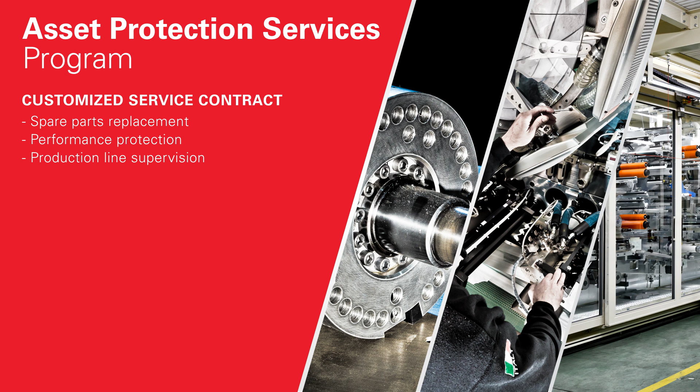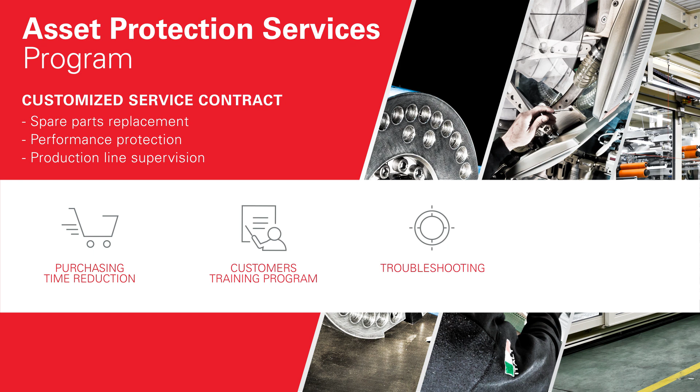APS is a customized service contract covering production support activities, including the supply of spare parts, maintenance, and production line supervision. The APS program is designed to reduce the total time spent in the spare parts purchasing process, reduce the learning curve period through customer training programs, increase customer troubleshooting capabilities through dedicated instruction, and ensure and increase machine availability.

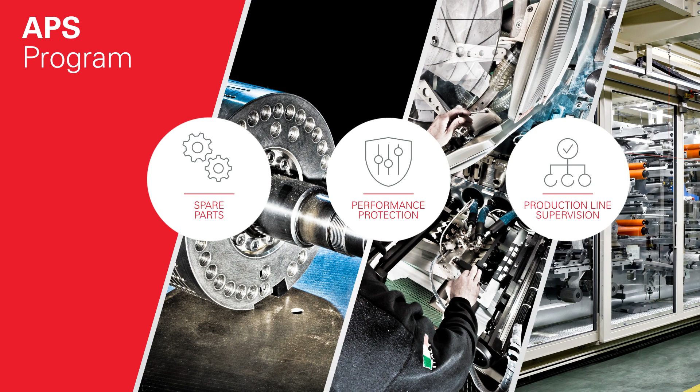Spare parts availability is key to guaranteeing continuous production. So, how does GDM do it?

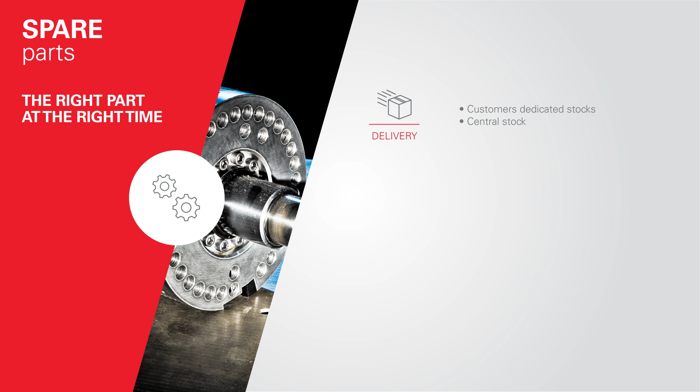Delivery: GDM has stock in strategic locations. Centralized stock for zero-time delivery of high-usage spare parts. Fast and complete transfer of technical information.

Quality: Longer life and reliability in comparison with non-OEM parts. High-quality components designed to ensure the best performance.

Web shop: GDM Web Services provides clients full access to the online catalog and real-time information.

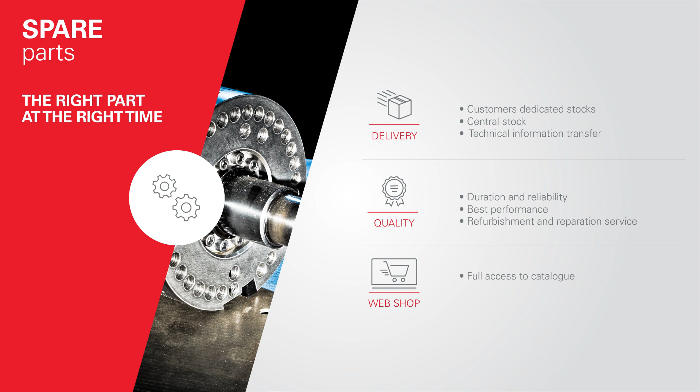GDM offers a broad set of services to ensure machine productivity levels.

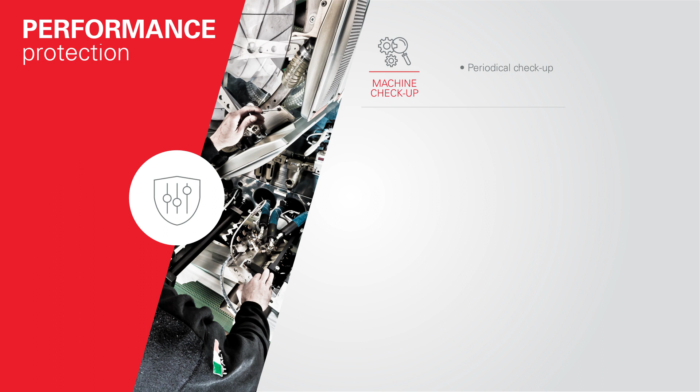Machine checkup: Periodic machine checkup and improvement tips from GDM Engineering Department. Maintenance cards: Clear instructions to help technicians analyze when and how to do critical maintenance work.

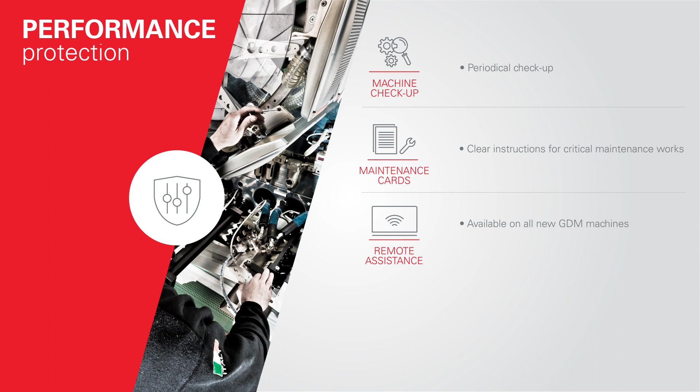Remote assistance: Remote assistance hardware is available on all new GDM machines. Remote support to help troubleshoot and detect the most common causes of downtime, lowering costs and response times.

Production support: Improve the learning curve and facilitate machine startup. SAT levels of efficiency and waste can be achieved sooner after startup.

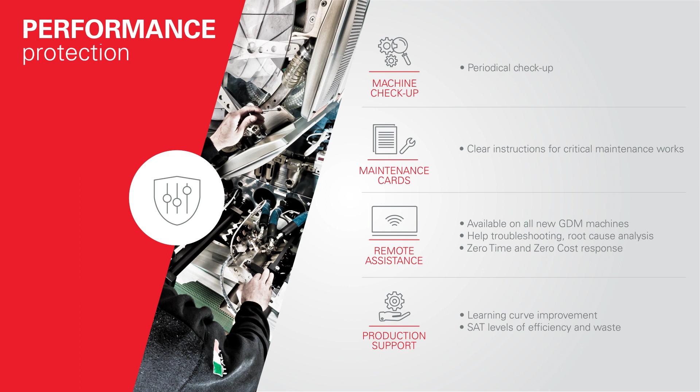Production line supervision is crucial to achieving the best performance levels with your GDM line. Losses measurement system: Identification of waste type and parameters for performance tracking.

Embedded sensors to control the production line. Data mining system to collect data and losses.

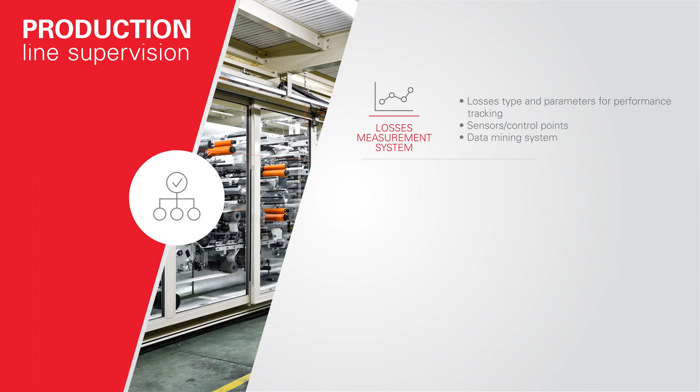Root cause analysis: Control parameter definition to identify root causes of waste. Identification of top causes by waste category.

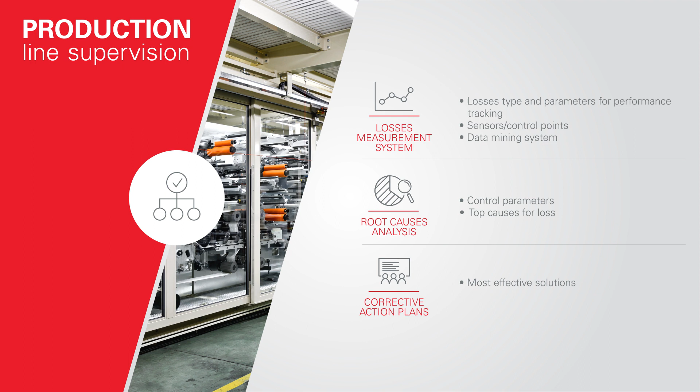Corrective action plans: Top cause analysis to identify most effective solutions. Training for technicians on root cause analysis method.

APS fits your needs of maximized production, streamlined logistics, and reduced costs. These are the core elements of our commitment to your results.

Asset Protection Services is a strategic set of solutions designed to protect your investment and maximize machine availability.

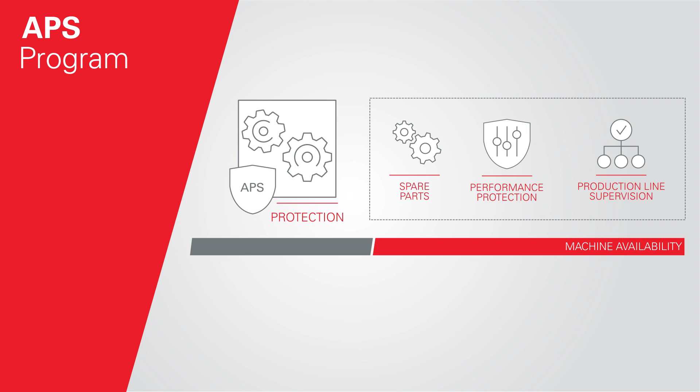GDM Asset Protection Services, our commitment to your results.